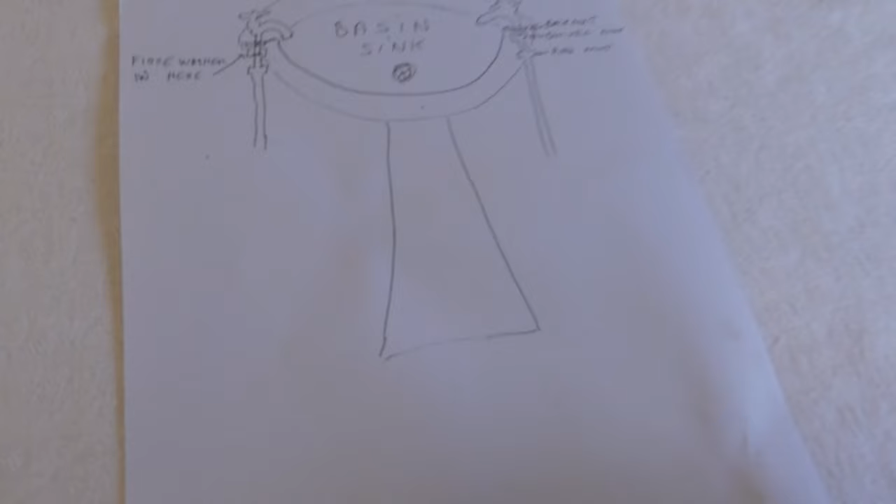Well, I'm going to show you. First of all, coming over with this little drawing I've done here on the table. I've done a rough sort of schematic of a basin.

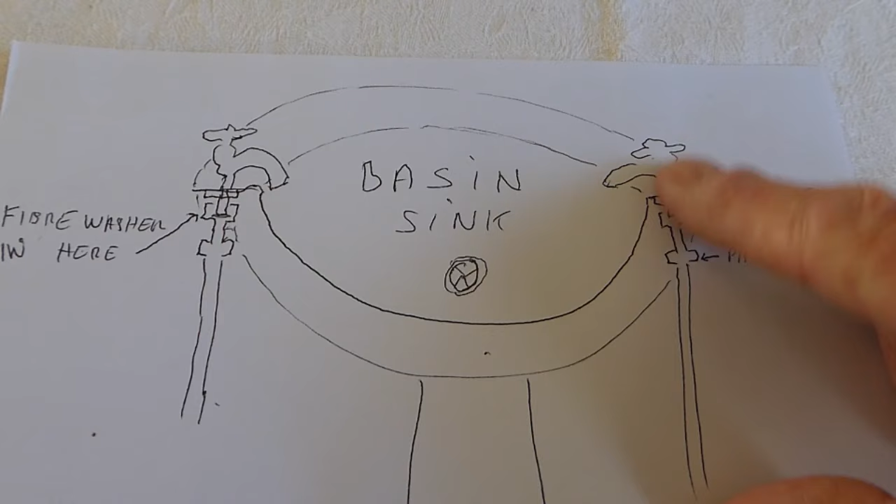Now when you've got your taps through your basin or your sink, it could be your kitchen sink, you have a back nut that does the tap up into the sink. Then you have what's called a swivel washer, a swivel connector - get it right, huh? Okay, and this is it here. The pipe goes in the bottom of it, and on the top of it is the swivel nut itself, and there's a little washer under there.

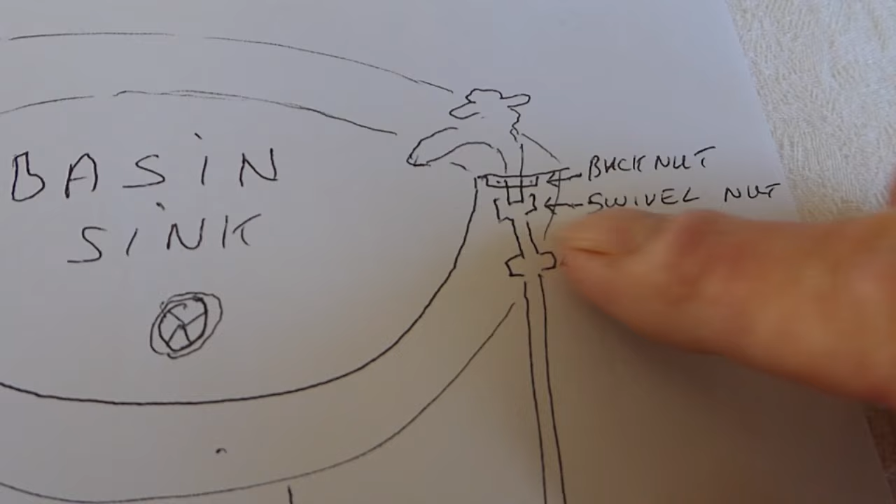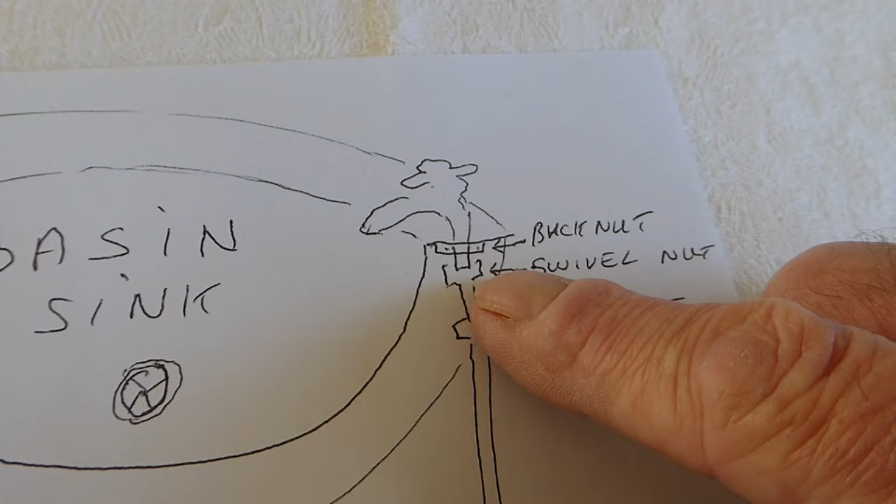A lot of times what happens is that washer wears away, and then the water runs down this pipe and drops off on the floor. Usually it is always that washer that's gone - very rarely the pipe nut and olive in there. Very, very rare. It's always under here.

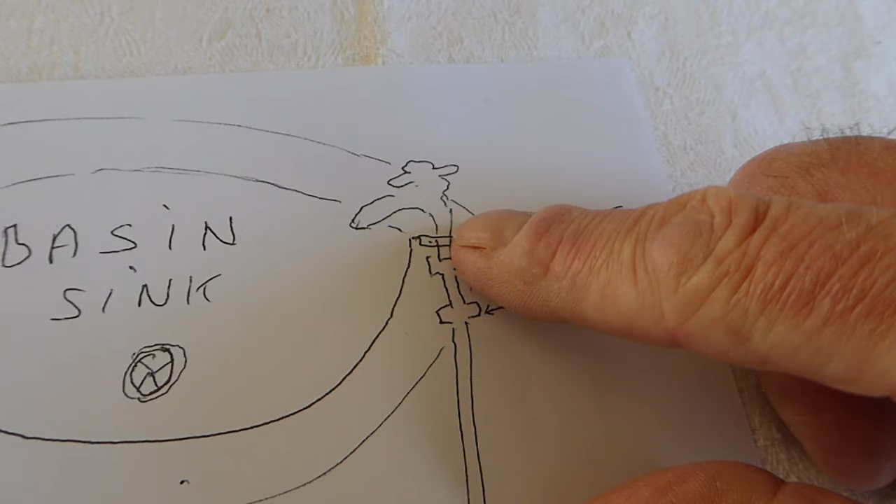Now, as I said before, if the tap is loose, it's possible water could come down the top of the basin onto the floor, but you'd get such a small amount and only when you run the tap, so you would know if that was the case.

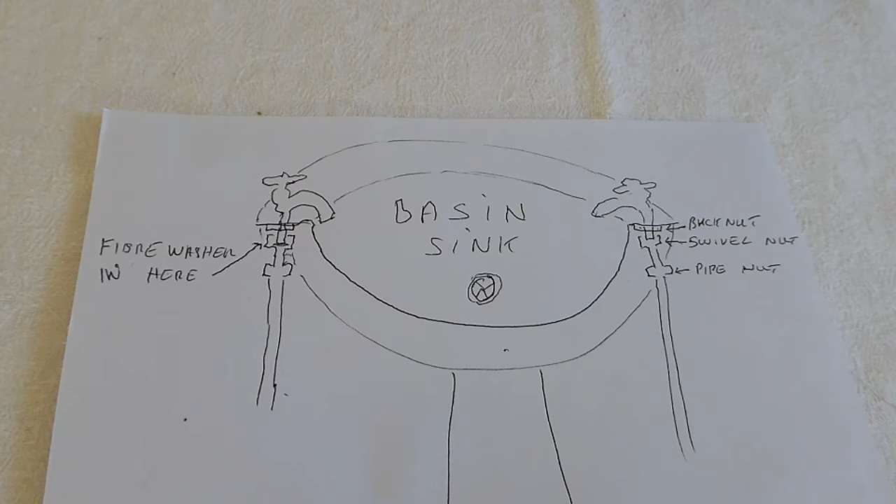But so we're going to look at this swivel nut and washer, and I'm going to show you now the actual tap. So if you want to come away from the drawing, this is basically what you've got.

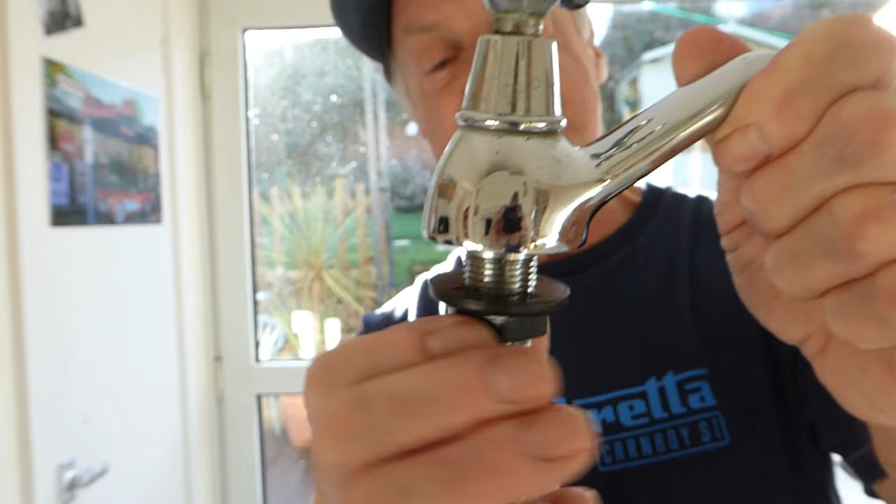Here is a basin tap, and you can imagine it's sat in your basin, with the back nut of the tap. So when you look up at it, you just see this nut and this nut holding it onto the basin. This will be the one - this is the swivel connector that will be leaking.

Now obviously, to undo these sort of things, you need something a bit special, because unless that nut is far enough down for you to get an ordinary spanner on - a lot of times this is so far underneath you can't get on there - you're going to need one of these.

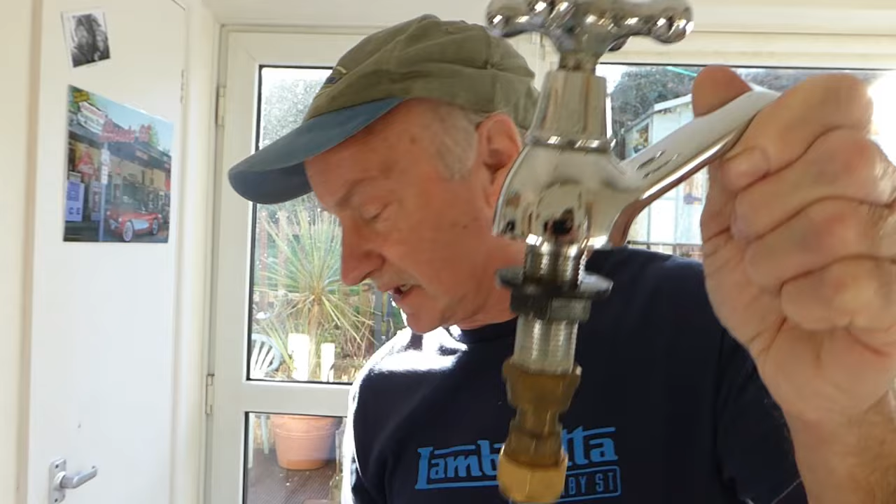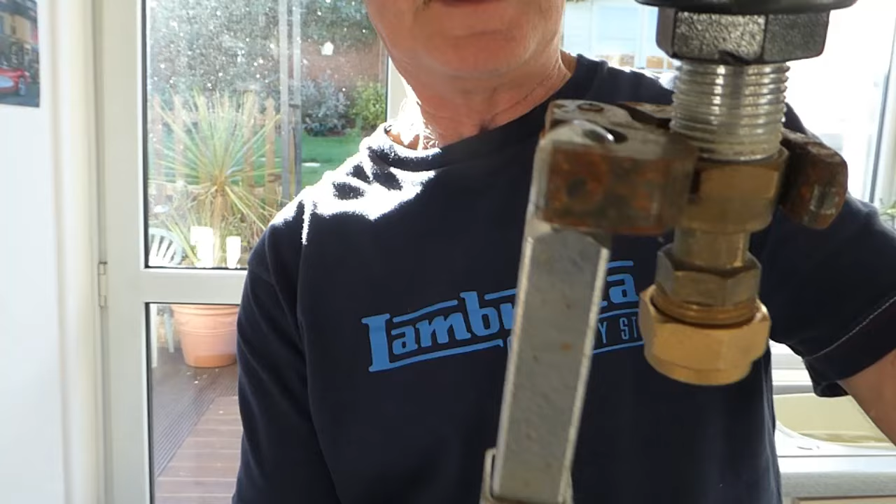This is called a Basin Spanner to undo it, and you can see why, because it's special. It goes around a nut like so, and enables you to get up in a small space to do it or undo it. In that case, that's doing it up. You turn it over that way, and that way is undoing it by flicking it around the bottom of the nut like so. But it's good with me showing you it like that, and undoing the nut.

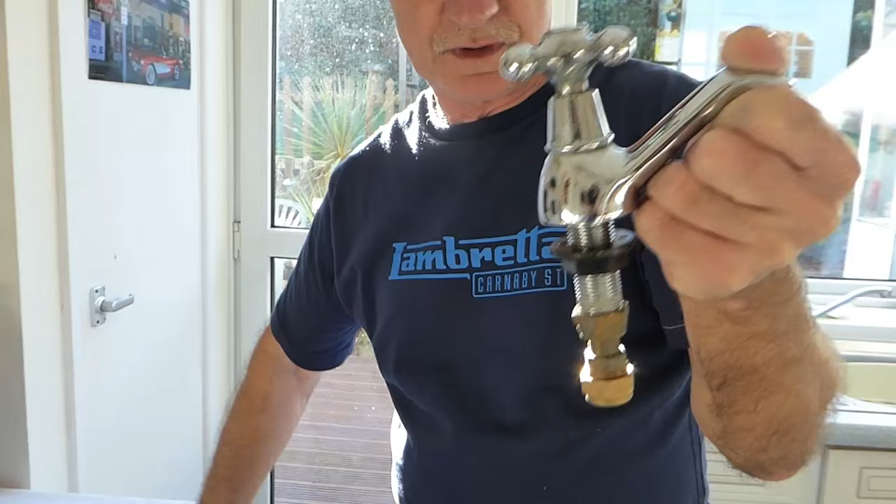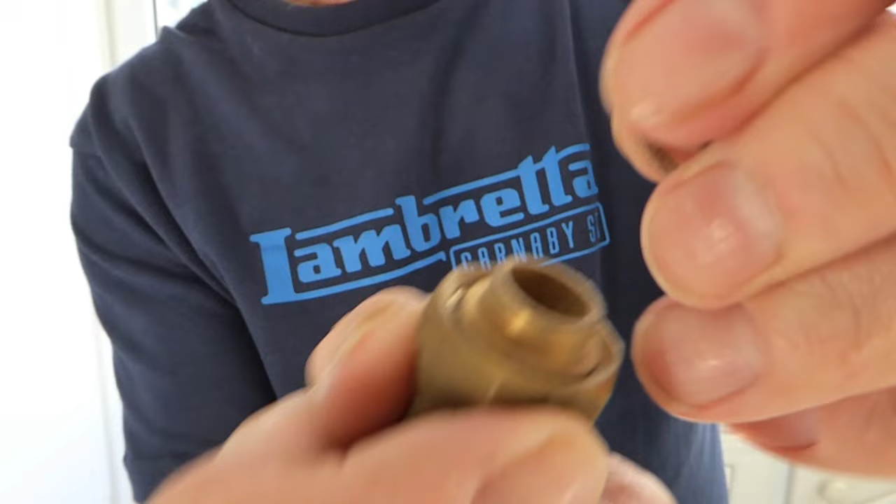Okay, so you do need a special tool, and that is the only thing with doing this job. But when you undo this swivel connector, you'll see that what you've got is a little washer there. You see that? Now that washer pops off. A lot of times that will be gone. That washer will be all disintegrated, and we'll need a new washer. So a 5p washer from the plumber's merchants, put it on there and redo it back up onto your tap.

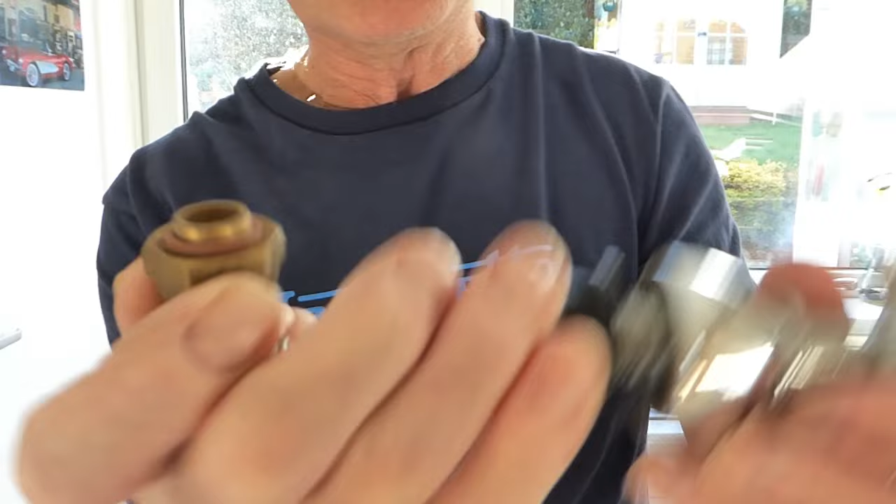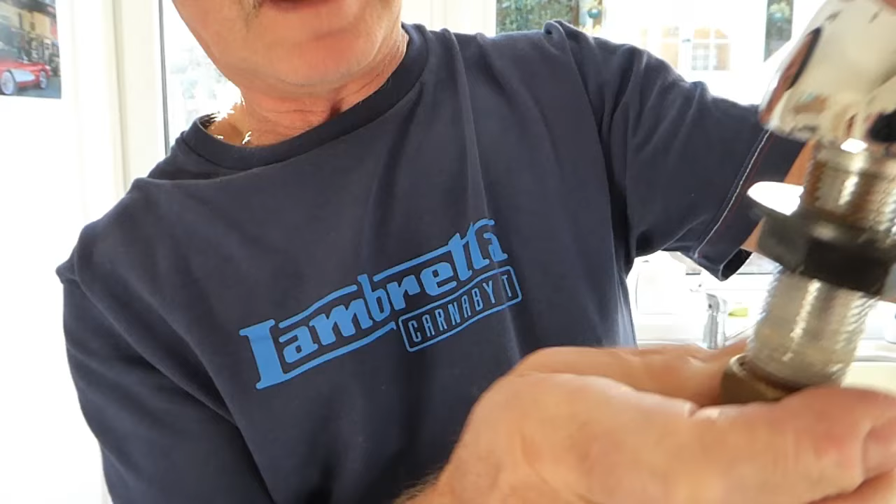Okay, now the other thing: if the pipe is stiff and solid and it's got no movement, so that when you've undone it you find it is tight like that and you can't get the pipe away, then it'd be better for you to undo the actual tap. Undo it about half a dozen threads so that it will lift up in the basin and pull clear of the swivel.

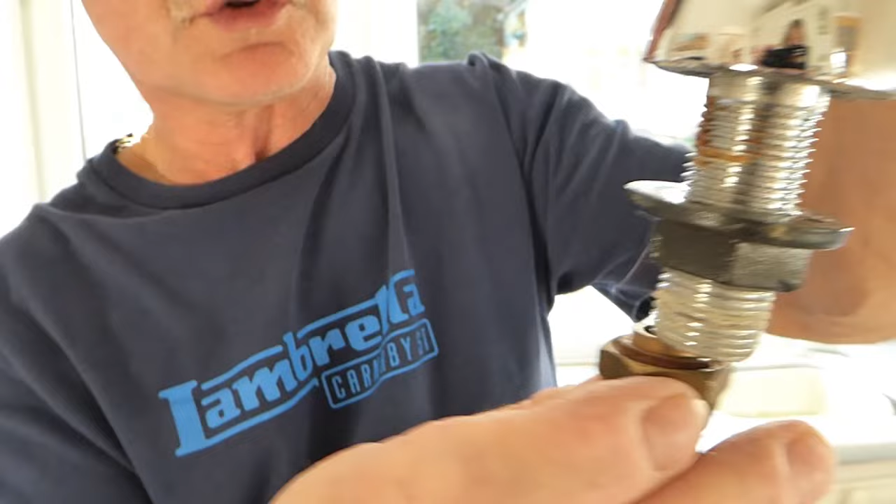So if you imagine you can undo that, and you can pull it away, you can take the tap right out if you want to, and then you'll have a gap that will enable you to get the washer on. Once you've got the washer on, you can redo it back up, and that's it, job done.

Alright, so to show you what the actual job is, I'm going to flick you over to a video I've done earlier where I'm actually taking one of these taps off the connector and putting another washer on, and you'll see how it's done. So I'll show you that now. It's a little basin, it is a bit tight. Now there's our joints up underneath there, and these are the ones we've got to get undone.

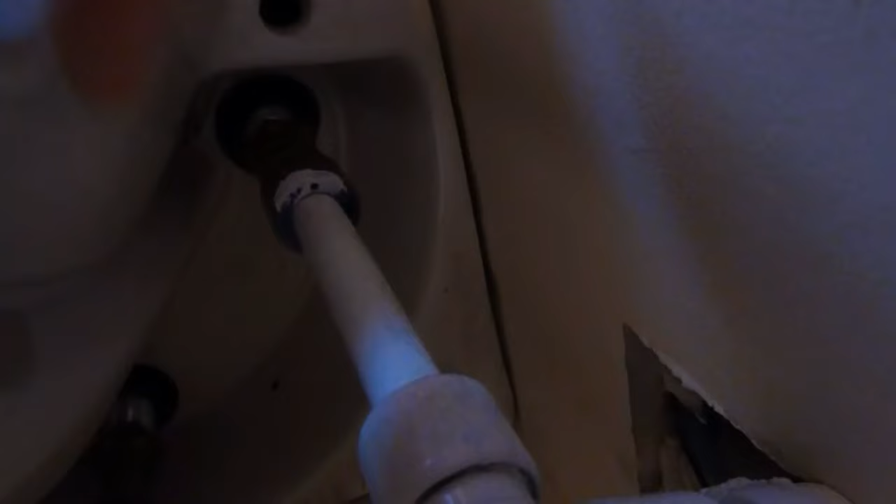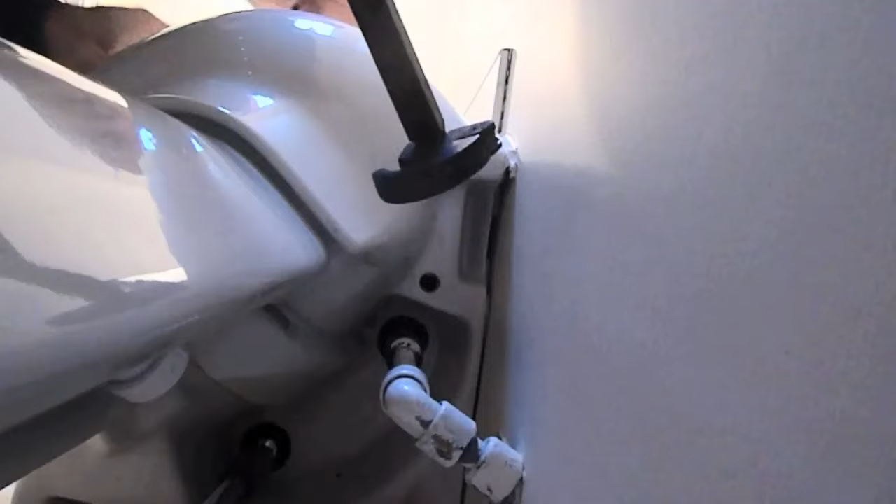Okay, now this job is impossible without one of these. This is a basin spanner, and it really is a must, and I'll show you why, because I'll get the spanner on the nut and you'll be able to see exactly what I mean, why you need one of these to undo it. So I'll just do that for you. Okay, I'm laying the camera down here just so you can see that there is our spanner. It's got to go up on a nut on the back of there.

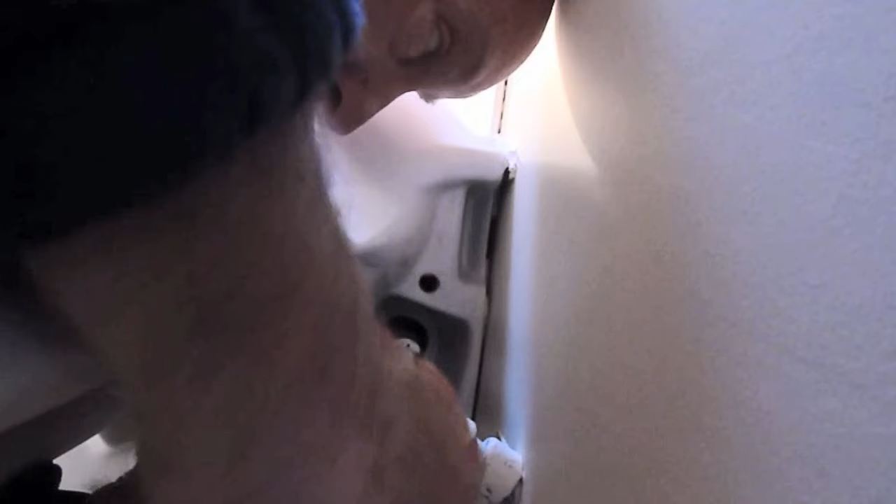Now this side is too awkward to get on, so I'm going to have to go around the back of there like so and get that on that nut there. Now I'm going to hold the camera up to it so you can see it. I'll try and lighten it up. Can you see where the spanner is on that nut? And that's where it's got to go to undo it, like so. Okay, I've just broken it and cracked it already, so I've already made it loose. But that's where the spanner's got to go.

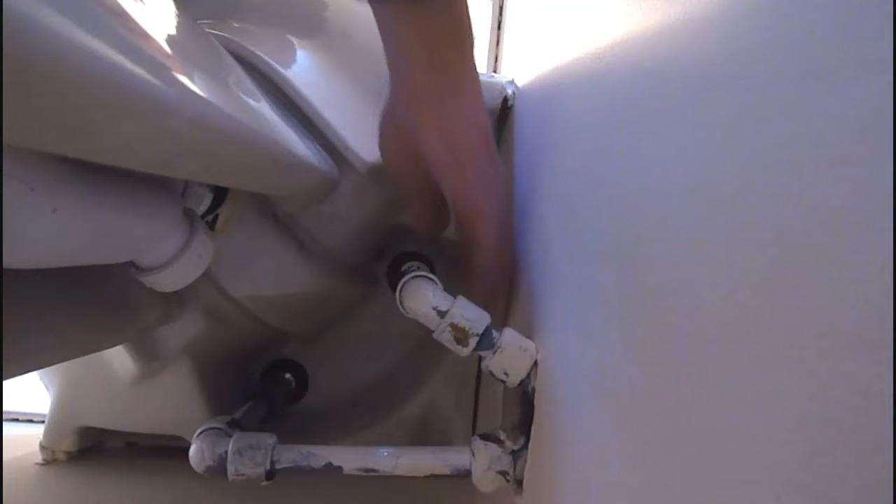And once that's off, then you'll see a further nut holding the basin tap in place. So I'll undo this one. I'll put the camera back down there. I don't know if it's seen anything down there. Okay, and that one is off. And I'll just show the spanner up there now. You can see it's up there on the nut.

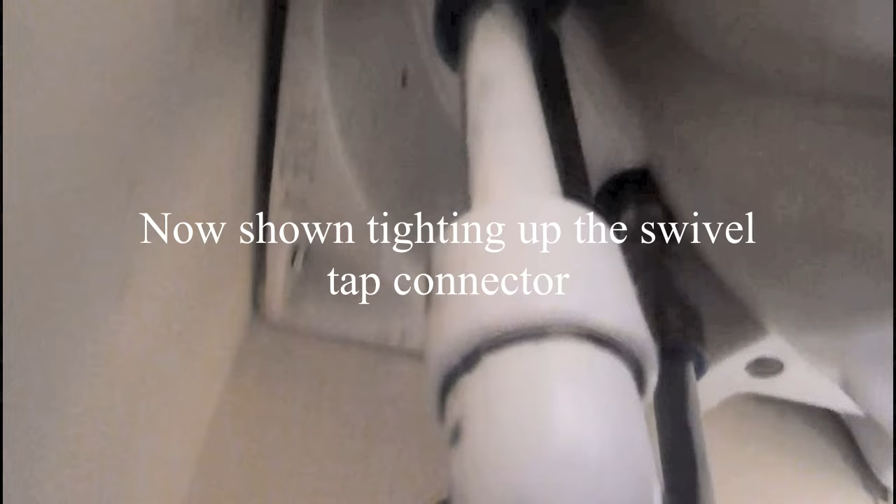And I'm sorry it's a bit dark up under there, but I'll try and lighten it a bit so you can see it. And you can see how the spanner goes around that nut to do it up. And that's all there is to it. I need two hands, so I'm going to put the camera down just to finish tightening it up. And that really will be it. Once that's tightened up, we can turn the water back on and those two taps are done. And done.